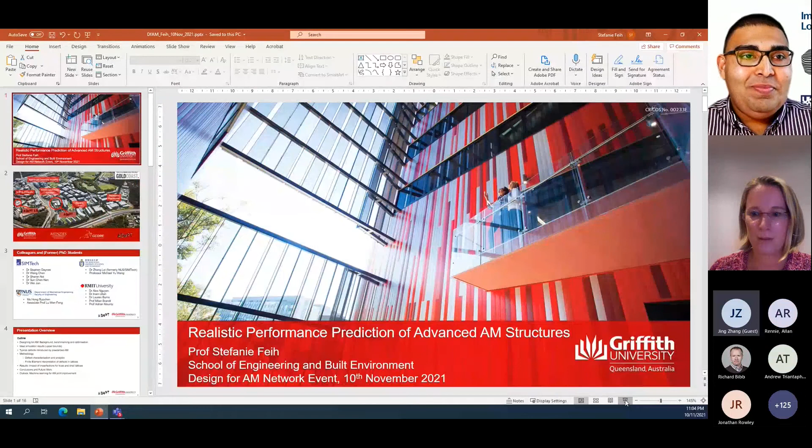It's my absolute pleasure, and thanks so much, Ajit, for inviting me to present at this event to talk about realistic performance prediction of advanced AM structures. And I really enjoyed your talk right now, so it's really nice to see how some of that will link into what I'm talking about now.

Just for a brief introduction, I recently joined Griffith University. We have our Advanced Design and Prototyping Technologies Institute, which currently has a very strong focus on working with medical technologies. That has to do with the fact that Griffith has the fantastic opportunity to interact with our Gold Coast University Hospital and the Gold Coast Private Hospital on the Gold Coast. It's also a very nice location to be at for those of you that have visited Australia and the Gold Coast. For those that haven't, once the borders open up, please do come and visit, and I'll be happy to host you and show you around.

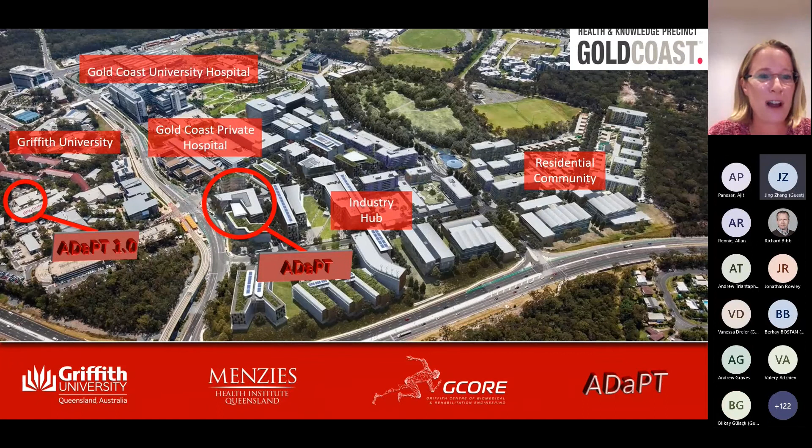The work I'm presenting today is related to my past work, mostly over the last 7 years with my fantastic team at SIMTech in Singapore. I'll show which publications relate to what, but I'd like to give a big shout out to my colleague Dr. Stephen Daynes, my former manager Dr. Sharon Nye, and also the fantastic collaborations with NUS and the Hong Kong University of Science and Technology. There's also some ongoing work that flows into this, still linked to my previous work at RMIT University.

So with that, let me just talk about the presentation outline. I'll be talking a bit about designing for AM. I don't have to give too much background because Ajit has done a fantastic job talking about topology optimization. I'll be mostly focusing on lattice designs - I'll show you why - and a bit of benchmarking and optimization.

Then I want to get into our simulations, where I'll talk about finite element simulations. When we push boundaries of additive manufacturing technologies, going towards thinner and more complex structures, we inherently introduce defects into our structures. That means our ideal simulation results generally predict upper bounds, and I'll show you examples of that. I'll relate that to some typical defects we see, mostly focused on powder bed AM, and the methodology we use to address this in realistic simulation, as well as some results showing the impact of imperfections. I'll give you some conclusions and an outlook that links nicely with what Ajit was showing, how we can utilize machine learning in these scenarios as well.

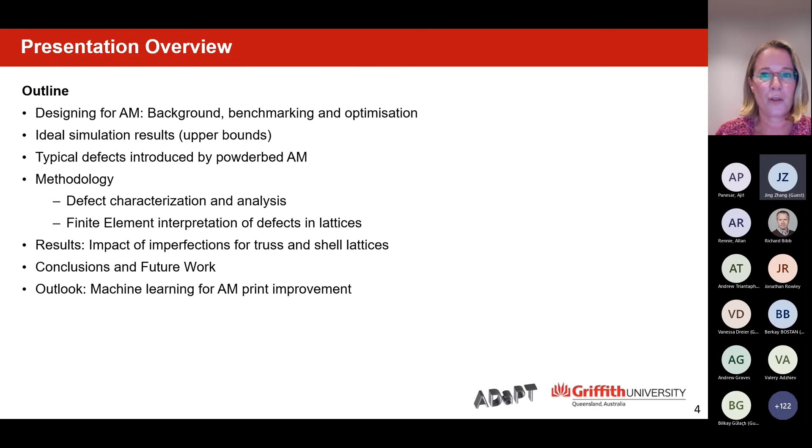About designing for AM: when we use tools such as topology optimization, lattice structures, and so on, we very quickly enter the territory of bio-inspired structures. The reason for that is when we look at natural examples - I've shown a few here - the tree structure with density variations, sea sponges with varying cell size and orientation, butterfly wings with color control - all these structures are based on truss or shell-based lattices.

There are inherent advantages to designing engineering structures with those kind of elements. We can tailor our strength, our stiffness. We have very high surface area, open cell architectures. Ajit showed a couple of examples there and talked about lattice optimization. Now what we see from those biological lattices is that there's generally significant variation in lattice cell size and unit cell geometry. If we try to mimic those kinds of things with our engineering designs, we very quickly enter the territory of sub-millimeter dimensions.

Now, of course, we like to push things as well, right? So we know technology in additive manufacturing has a laser spot size, so we understand melt pool and so on. We know what the manufacturing limitations are, and we try to push towards that. So with the development of more advanced manufacturing techniques, our designs also evolve.

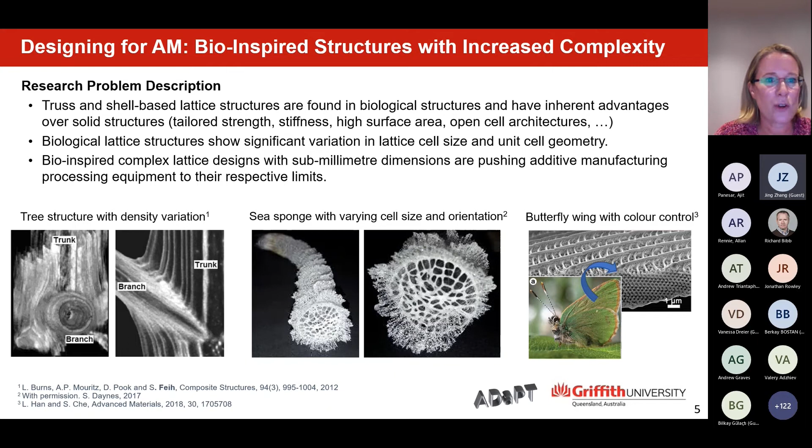Now, what does that mean if we actually want to predict the performance of these structures? I'll show you a couple of examples here in terms of benchmarking.

My former PhD student, Lei Zhang, now Dr. Lei Zhang, published a beautiful paper in Additive Manufacturing in 2018, showing how these TPMS, the thin wall structures, fail and compress and deform in comparison to some of our more common lattice structures at that point. So they all under compression have quite similar characteristics.

We see an initial stiffness, we see a plateau, and then we see a collapse scenario where the cell walls start to impact on each other and we get densification.

With these kind of graphs, Ashby type plots, we can do some ranking of structures. Not quite sure how clear it is, but the wall thicknesses we're looking at here are ranging from about, as designed and as per weight of the structure, from about 115 micrometers to 250 micrometers. So as I said, we're really trying to push the limits of the equipment.

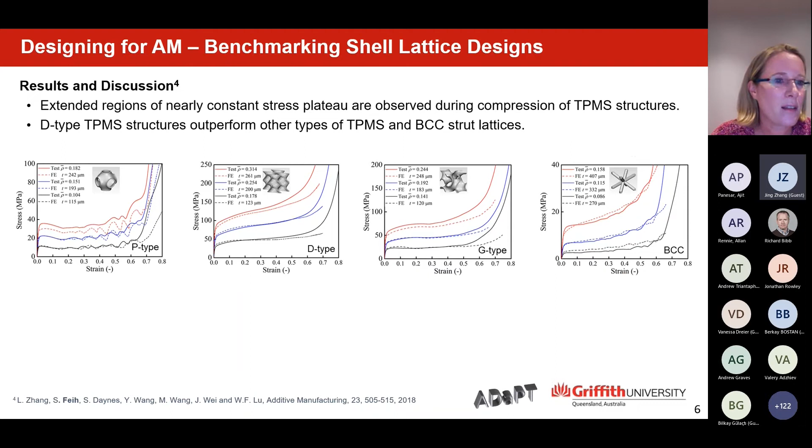If we do this kind of ranking, you can see it in the paper, the D-type shell-based structure performs best. Now why is that the case? That's where simulation comes in and gives a bit of explanation.

For a lot of structures, what we can see is localized shear band deformation as structures collapse. For the best performing structures, what we see is a very uniform collapse mechanism. That means we have very little local variations and buckling. We have a nice plateau that keeps increasing in load, and generally those structures can carry a higher load.

So the D-type just shows very uniform deformation, while G-type and BCC structures, for example, show us localized shear bands. And the simulation is picking that up very nicely.

In case the images don't show that well here, please have a look at the publication and you will see it more clearly there.

We can use FE simulation, that's the main story here, to predict the complex performance and collapse mechanisms. In the paper, we explain a bit how we actually made sure that we're not over predicting the results, but generally what you can see is that there's always a bit of over prediction, and I'll explain why that's the case.

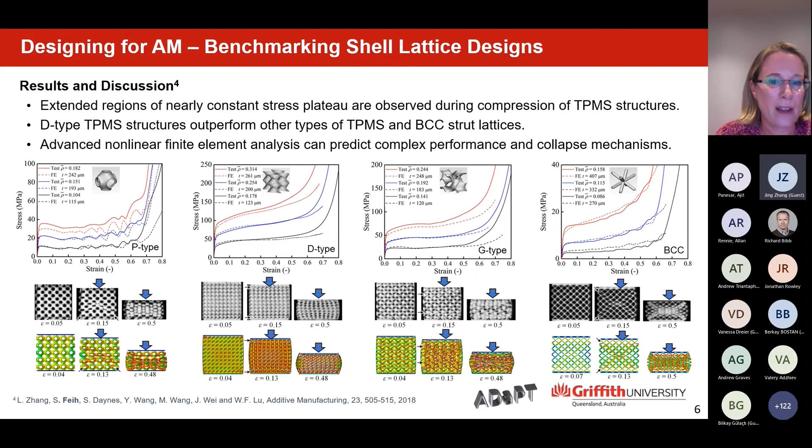Now I also want to highlight quickly some work by Stephen Daynes, my colleague at SIMTech, on optimized strut lattice design. We saw a couple of things earlier that Ajit showed.

We've done a lot of work trying to figure out how general lattice structures with very uniform cells perform against spatially aligned lattices, which is what we see in nature.

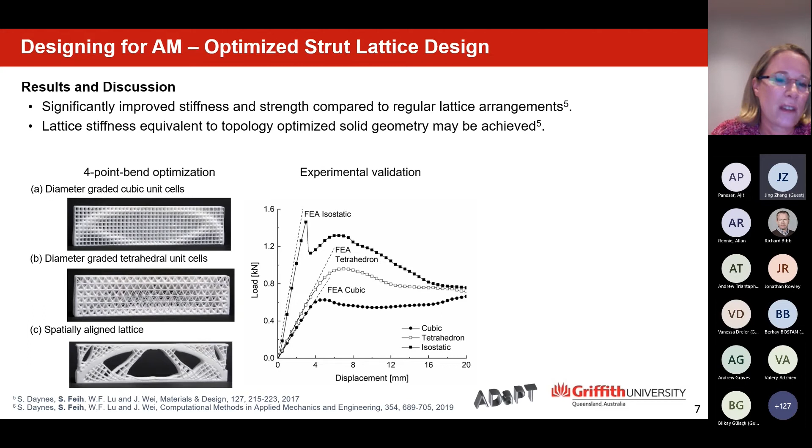We could actually show with our patented algorithms that we can come up with spatially aligned lattice structures. This is based on the strain field, and we align the truss elements with the principal strain directions. We can see in that case that the finite element, or the experimental predictions, increase significantly in stiffness and strength.

We can also use these kind of algorithms for full 3D problems with arbitrary volumes and apply the lattice generation algorithm to that.

The nice thing here as well is that the structure Ajit was talking about is supportless. Well, in this case, we would actually utilize the lattice structure as our functional support. So it has a role to play in the optimized, topology optimized design. There's no need to remove it afterwards. So therefore, we have basically a multifunctional lattice here acting as both support and load bearing member.

Again, some very nice publications here that you can look up by Stephen Daynes as the first author. Again, we actually predict all these things fairly well.

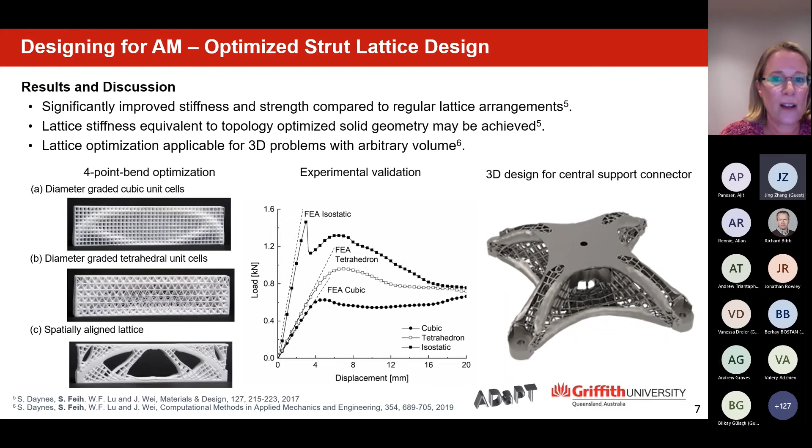The solutions are available. I want to point out that our minimum truss diameters here, we restricted to about 1 millimeter. So that is well within the manufacturing limit of the structure and the equipment, and the FE predictions are therefore in very good agreement.

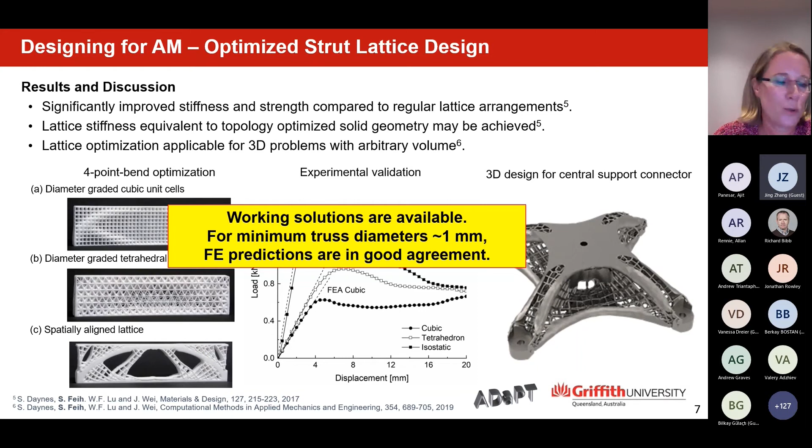So what happens now if we push that manufacturing limit of the truss diameters, the shell wall thicknesses, further to low values? I want to explain a few things here. I'll show an example about the truss lattice, where we have a little Kagome model. We printed this, and we have our ideal FE model.

If we're loading this to buckling failure, we generally see that the experiment gives a lower stiffness and a lower stress, and the peak load value is much smoother for the experiment than for the ideal model. I also want to point out this ideal finite element model doesn't buckle by itself. For those of you that know nonlinear buckling analysis for numerical simulation, ideal structures need a bit of a push—you need to introduce a bit of an imperfection to make this buckle.

And that's what we see in natural structures as well—they have imperfections. So here we're introducing some minor initial imperfections, very small, and we can capture the buckling failure well, but we still overpredict the experimental results, and we made sure the finite element model has the same volume based on weight and so on.

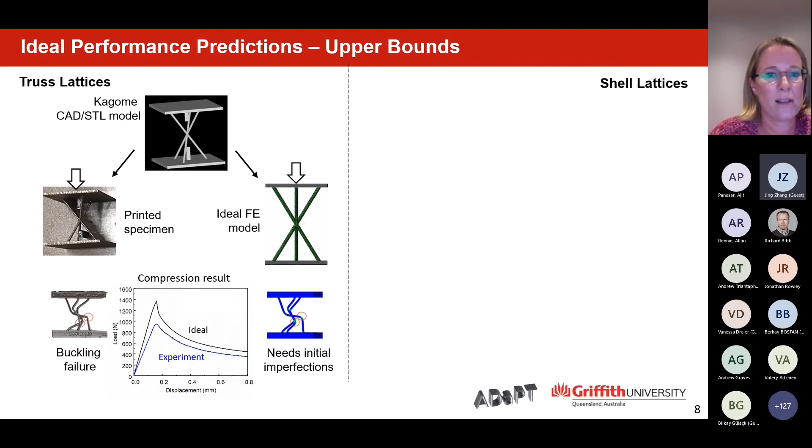For the shell lattices, we see quite similar things. Again there's a TPMS model here—a triply periodic minimal surface design—where we produce the ideal FE model, and again we see a higher stiffness, a higher plateau stress. Yes, we're capturing the failure mechanisms properly, but everything is very uniform and symmetric, while in the experimental result we see non-uniform behavior because of imperfections.

Now I think that is the assumption, right—that these differences are due to the imperfections in the structure. What we don't know is which types of imperfections contribute how much, which ones are the most important to consider, and do these imperfections act in a superposing manner, or a synergistic manner? Are there certain imperfections that, when put together, result in a much larger property reduction? And ultimately, can we choose designs that are quite insensitive to the imperfections?

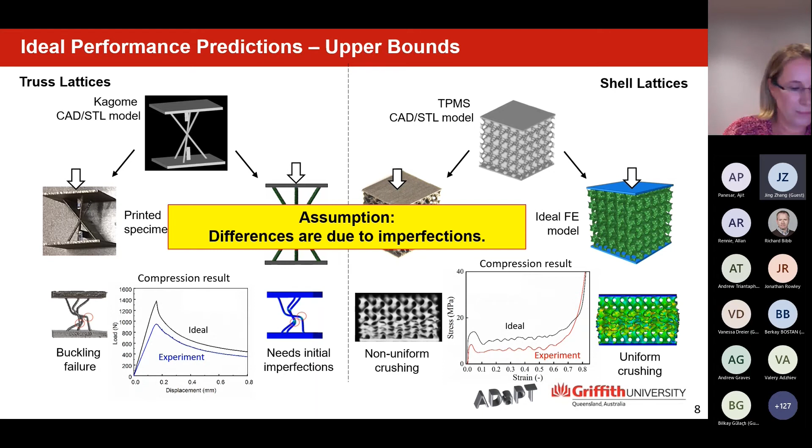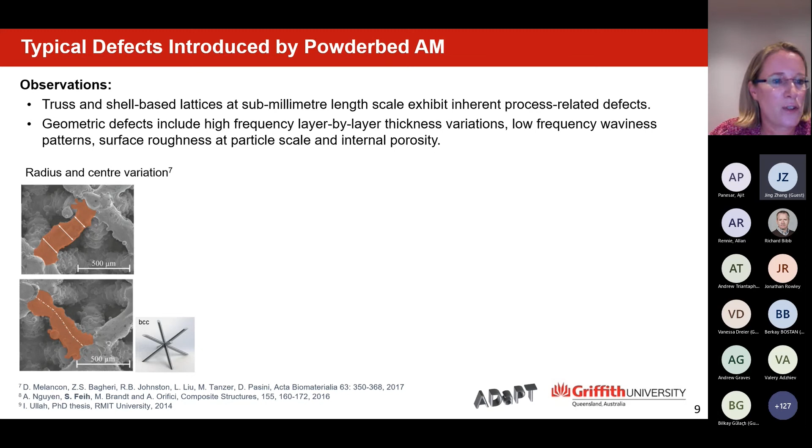Some typical defects—not all looked at by our group—but for trusses, if we print, you can see very small printing diameters, coming down to about 150 micrometers. We have a lot of radius and center variations, meaning nothing is really straight because of the layer by layer printing process. If we look at shells, thickness variations and waviness—again we see deviations in diameter or thickness, and we even see holes in the structure depending on the printing and overhanging angles. We can also see surface roughness.

For powder bed processes, our average particle diameter is in the order of 30 to 50 microns. These particles attach partially to the surfaces in the melt pool, and when you push the wall thickness down to the order of 100 to 150 micrometers, those particles and their roughness start to contribute significantly to the weight of the structure without helping the mechanical performance. If structures are 1 millimeter or 1.5 millimeter thick, this doesn't really matter, but if we push it down to 100 micrometers, it becomes a very important aspect.

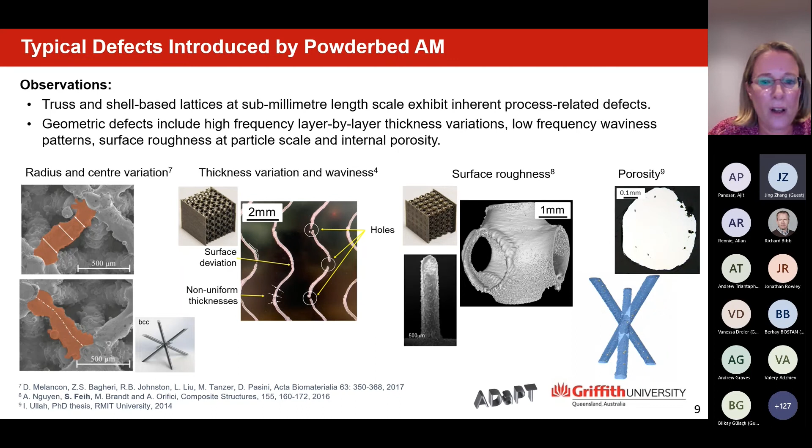And lastly, some porosity as well, which is always inherent to the printing process. It's small, but it's still present.

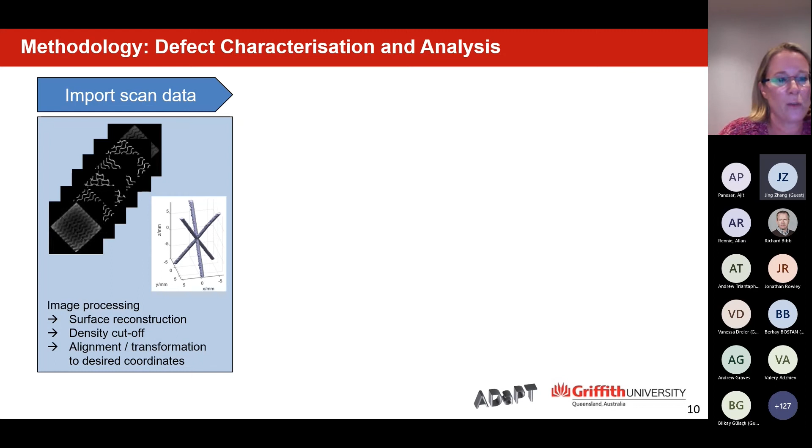In terms of methodology, how do we analyze this? We're working a lot with X-ray data—image processing, reconstructing the image, density cutoffs that also affect the porosity, and alignment and transformation to the desired coordinates. We then perform analysis via scripting and automated manners in various codes, looking at local wall thickness and surface normals for the shells, and for the trusses, the position of the circular cross-section, the variation in the center position, and the radius variation.

That gives us a database, which gives us stochastic information. We can either map directly or, in long-term planning, use this to understand our equipment, materials, and structures better. We want to collect this stochastic information and identify the parameters as a function of overhanging angle, identify waviness, and so on. I want to make sure you understand that this database will be material, process, and equipment specific—that's quite important.

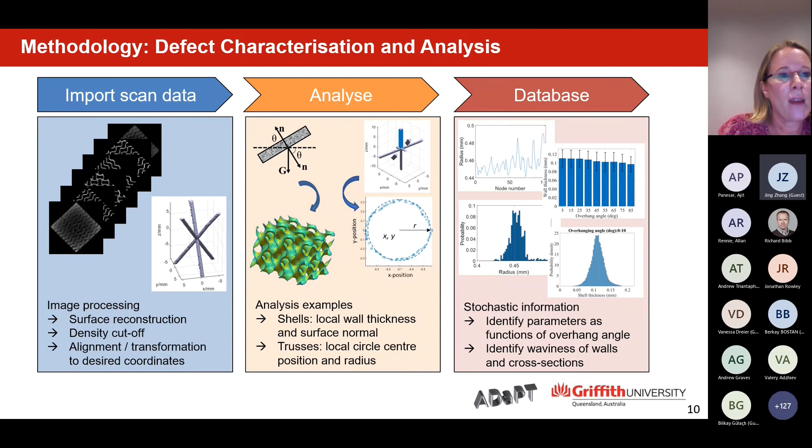Moving forward, this can also be used for machine learning processes. From a finite element point of view, how do we treat this? If we're looking at trusses, we work with beam models for simplicity and easy defect mapping and stochastic variations. We can map the beam waviness by introducing layer offsets. We have beam elements on the order of the layer thickness, so that works, and it's still a fairly small computational effort.

We can introduce stochastic radius and radius variation. We can introduce porosity by reducing the modulus. We can introduce roughness by reducing the radius.

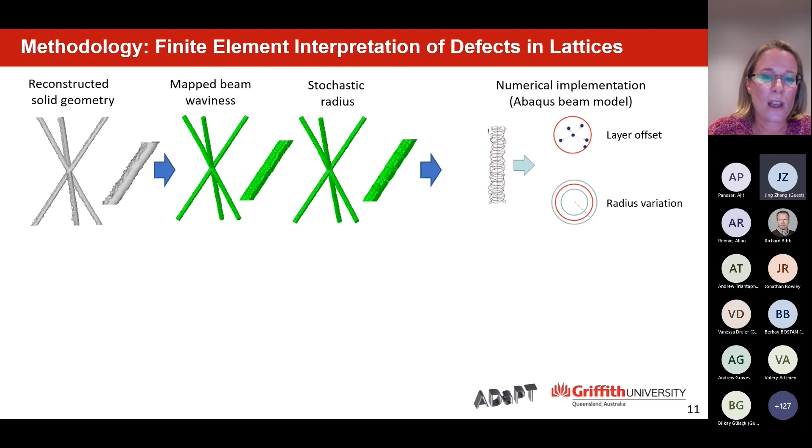Similarly for our shell structures, we can map the shell thickness, a bit more complex because of the surface normal, but we can map this locally. We can also introduce stochastic shell waviness.

Important here is that if we introduce the roughness and thereby reduce the wall thickness, we have to introduce some surface elements to make up for the missing contact surface. That surface element doesn't have mechanical stiffness, but it provides contact stiffness for the densification. That's important if we reduce the shell thickness.

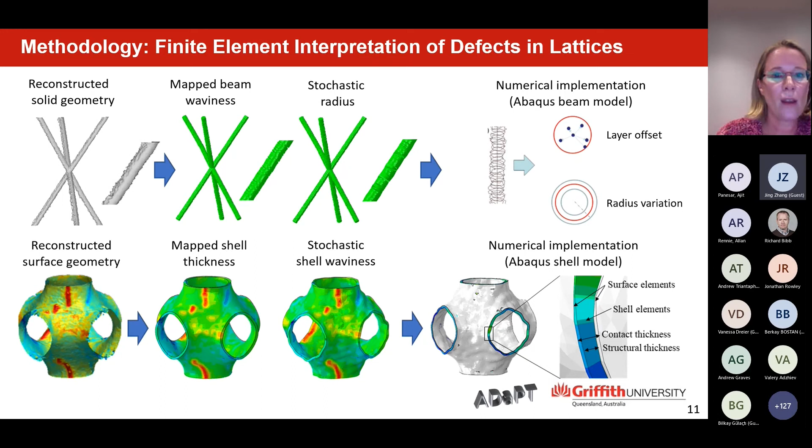Okay, so now some results. What does it actually look like? I'm showing here the buckling of a very simple unit cell, but this can easily be expanded to an array. All these truss lattice defects are superposed for the realistic model.

You can see as the model is loading up, we're plotting stresses here, that those are not completely uniform. That is because there's radius variation, some offset in the radius. So very importantly, the yellow line would be the ideal, the red line is the experiment, the blue is now the simulation. We can see that the agreement is much better. The stiffness has reduced, the peak stress has reduced.

So we can systematically study the input parameters for defect sensitivity studies here with this beam element approach. We've also mapped the beam elements versus the solid elements, so there's good agreement, but of course the beam elements have the advantage of faster computational time and allowing for systematic variation of our input parameters for sensitivity studies. That's work that's currently under preparation for publication by my current PhD student, Hong at NUS.

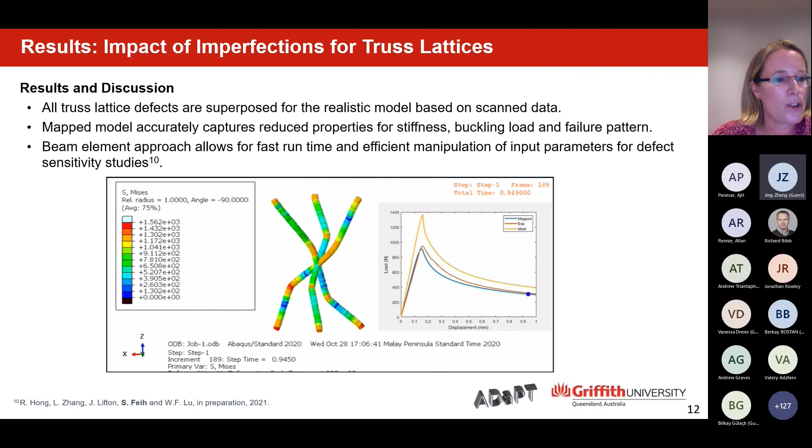Some other impact here that we see for the shell lattices. Again, defects are superposed, and we see that we can easily reduce the stiffness and the plateau strength by introducing the defects I mentioned. What we can also see is that the experimental results are much more closely followed in terms of unsymmetric failure mechanisms compared to the ideal finite element model.

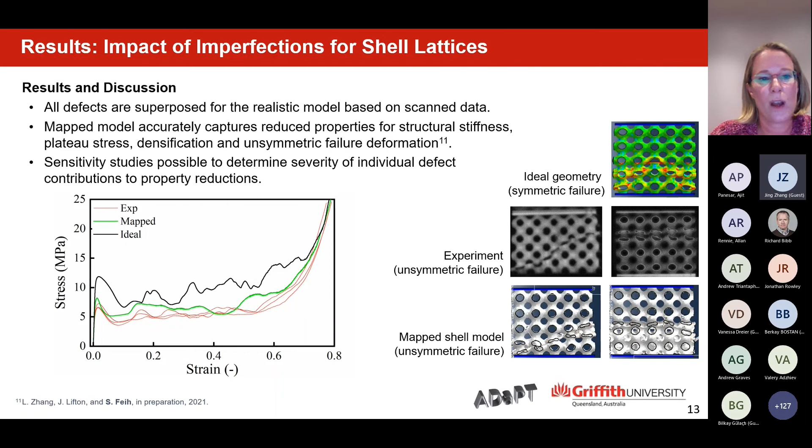And again, we can do sensitivity studies via our shell element approaches. So a bit about the conclusions here.

It is important when we push the boundaries to capture these types of defects. Interestingly, maybe expected, these defect types do not influence each other and therefore can be superposed. So we haven't found any effects of defects acting together in some manner to further degrade properties.

With this kind of work, we can look at defect sensitivity in a quantitative manner. We can rank our shells and truss lattices, and we can also look at the effect of cell scaling.

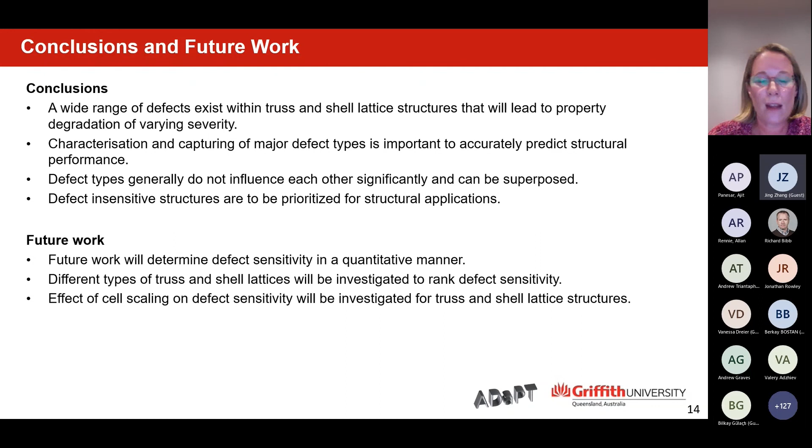Now, as an outlook, I just quickly want to show something here about machine learning. I haven't talked at all about process improvement. We've basically gone with the defects we have, assuming we will always have some defects. We can use machine learning, and we've done that here.

Again, Hong has published this in Additive Manufacturing this year. We can use artificial neural network training to compensate for truss lattices being not perfectly round in printing, depending on overhanging angles. We've shown here that, with X-ray data collection, we can come up with the overhanging angle.

We can determine the non-roundness and the error in the area compared to the original print design, and we can use machine learning to compensate or come up with free-form compensated designs that we can fit into SolidWorks and slice and actually print.

And if we do that with this kind of compensation process, we can actually cut out a lot of process optimization, especially for small scale structures. We hit our design targets much more easily, and we can also improve the roundness of our structures.

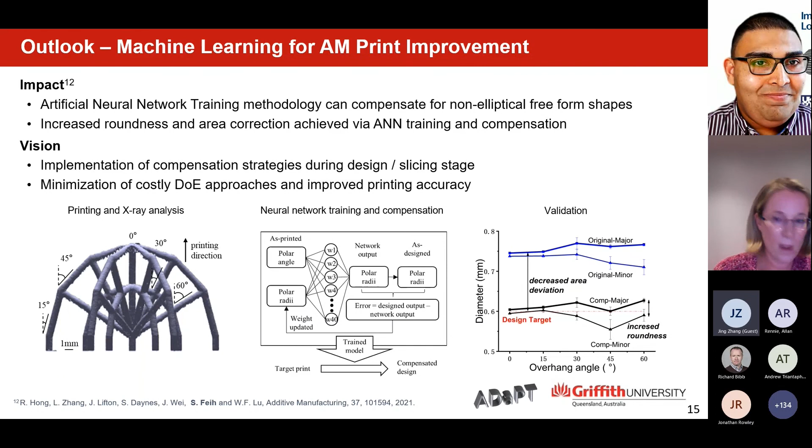So machine learning has a lot of applications in the future, and I'm sure we'll see a lot more of that. And with that, I would like to thank you.